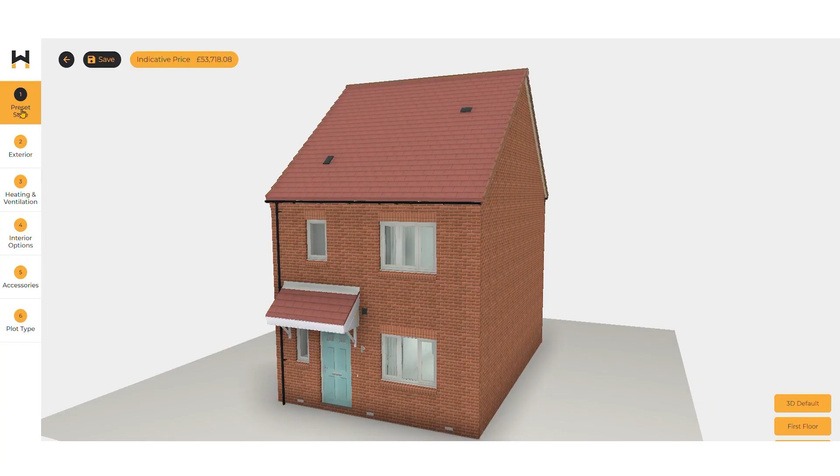I don't know of any other projects that bring all suppliers from all corners of my industry into this way. I think it's great that we've got 40 manufacturers, 20 designers and 1 architect that have been brought together for this project. When you bring together all of the supply chain, the designers and our team, that adds up to over 500 years of experience that has gone into every single house design. I've never been involved with a project before where we've worked directly with other manufacturers to produce one whole house.

I think it is fair to say that the industry is quite traditional, and it does have to adapt with the modern world. We do need to embrace change and modernise the way that we work, right the way through the process from start to finish, whether that's an architect, an engineer, or a manufacturer in our case. For house building, it's definitely an industry that should be utilising technology more readily.

It's clear during the process that I've been working on this that it can be done, and it can be done to a really high standard. Typically the construction industry will say we've always done it that way and hasn't been keen to change. However, with the Whole House project, we started with a blank piece of paper and we always asked why to every decision that we made.

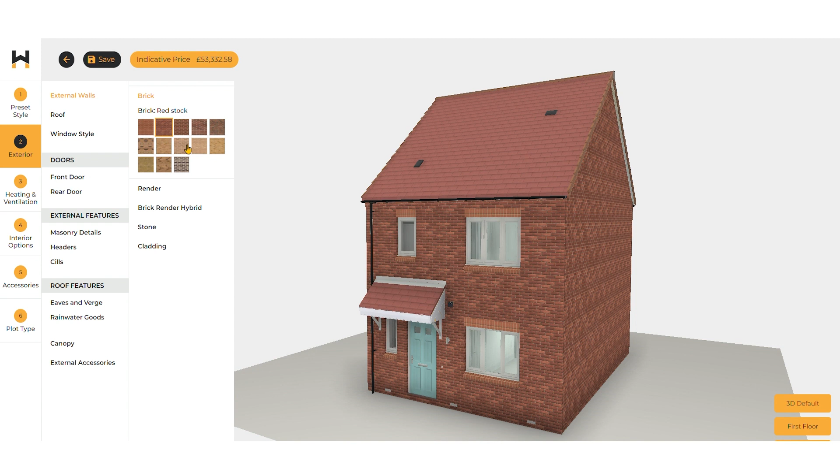By challenging ourselves right across the design process, we've been able to bring innovation across all parts of the design itself. Travis Perkins' Whole House project is set up to deal with design issues very well, and in my opinion that's because it's following a BIM way of working.

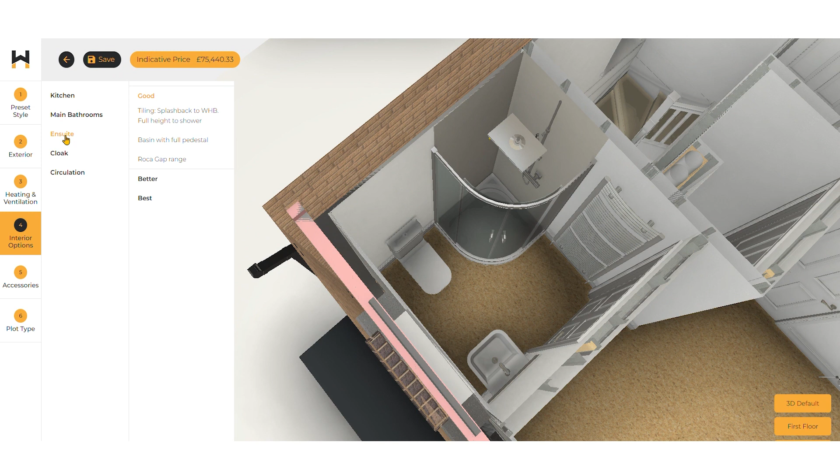So BIM stands for Building Information Modelling, and essentially it's where every component of that building is modelled in 3D, which is what we have here with this project. Being able to review designs in 3D beforehand will just eliminate any issues that we have on site because we've already tackled those issues. I think that'll be a massive benefit.

It'll be cost and time saving. Up until now there's been nothing as effective as this to eliminate site issues. With the Whole House project, there's a huge amount of effort that goes into the design stage before it gets anywhere near site. So we've done all of the thinking and the coordination before it's needed further down the process.

Space Group have been involved with innovative projects and digital workflows for many years. This project is a great example of bringing all of that together into a single environment.

Some might think that Whole House is a standardised product, but we think it's the actual opposite. Whole House gives you the opportunity to select a very wide range of options, but with the confidence that it's all pulled together in a very comprehensive and high quality way. There's a huge range of options that the customer can choose from, knowing that they're fully compatible with each other.

And that's because of all of the work that the manufacturers have done behind the scenes that the customer doesn't need to worry about. Often in the architectural profession, standardisation is seen as a negative, but we believe it is a real positive for reducing carbon and improving the quality of products. What the Whole House project does really well is bring all of those components together and demonstrate how that quality can be delivered and how we can reduce waste.

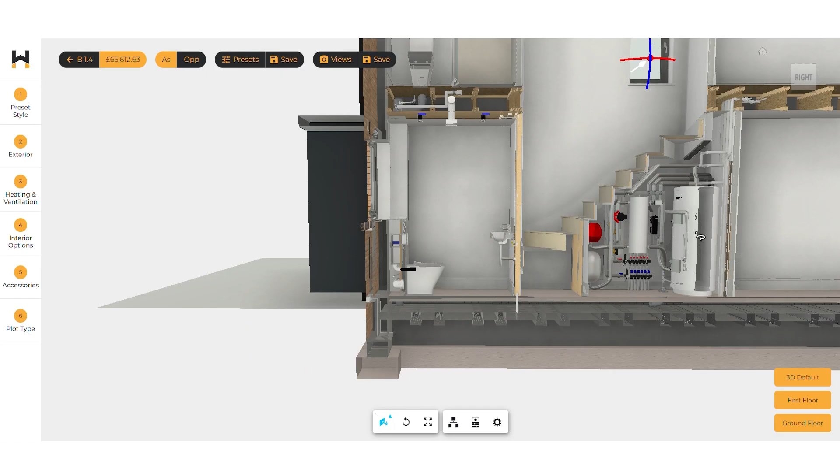I would say how this benefits the home builder is more than likely simplifying the whole process. It reduces the risk involved for them because all of the work has been done up front, and it is literally just a case of choosing their options and going from there.

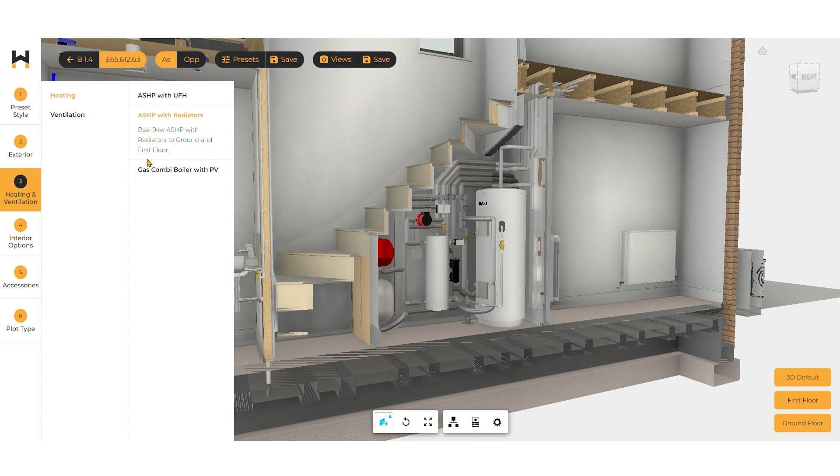One of the dangers that the customer faces between manufacturers like ourselves designing systems and then the procurement of the parts actually finally on site is that there can be a watering down of the specification. What Whole House does is give the opportunity not only to pick the exact specification you want, but also has dynamic pricing so you can see the impact of the choices you're making, and also gives you a 3D visualization to actually see what that selection will look like.

So the customer can choose any spec that they like with the confidence of knowing that that is within building regulations. So as a team, we've considered the knock-on effect of all of our design preferences.

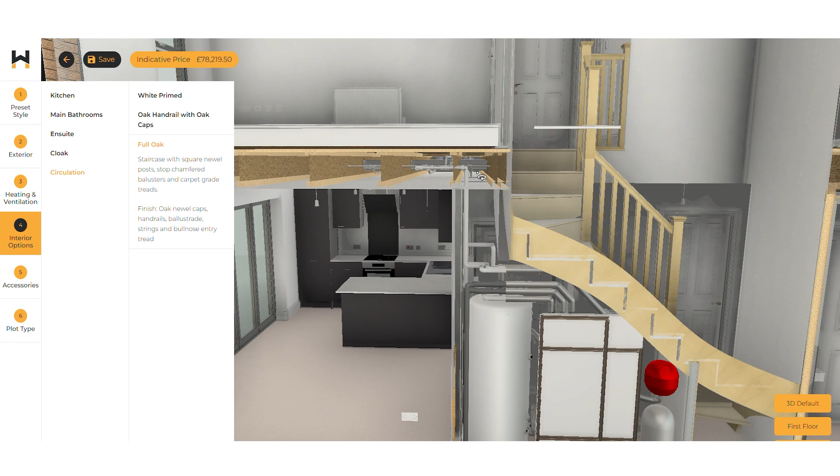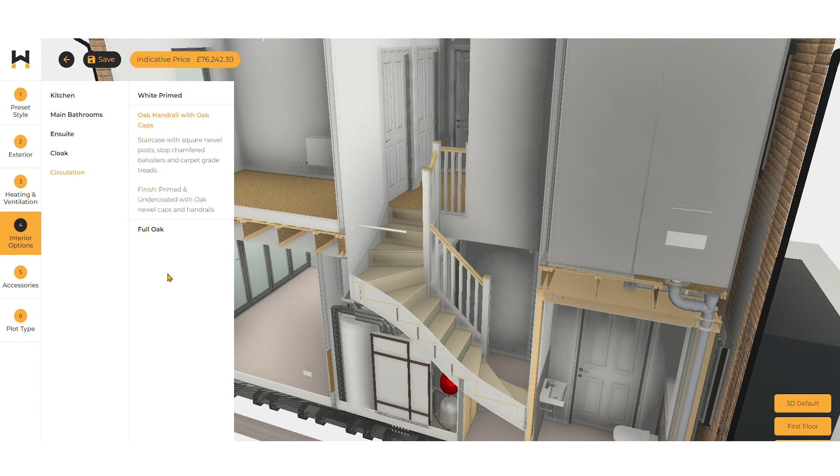For example, pipework under the floors, we've brought in waste designers, ventilation designers, joist designers to collaborate within that one design. We've addressed the material and labour cost by dealing with Staircraft directly. They're the company that link most closely with ourselves as a drainage manufacturer. So through conversations with them and Travis Perkins, we've managed to reroute pipework to get the most cost-effective solution.

That works for everyone. Normally, any plumbing pipes would be drilled on site, but we already have those built into the floor. The space in between pipes is already set, so we're removing the risk of the plumber drilling incorrectly, which would result in costly remedials and time spent on site with labour to fix that problem. We've overcome that, so you won't see that problem on site. We've already got the holes pre-drilled, ready for the pipes to go into.

So this is just one of the ways that we drive down the material cost and the labour cost with Whole House. One of the big benefits from Whole House is the accuracy you get for materials, so forecasting of materials. Every component of that house is already predetermined, so supply chain issues become easier. For example, if the plumber calls up and asks for 20 more bends, the client can have confidence that they have deviated from the design and can question why they need them.

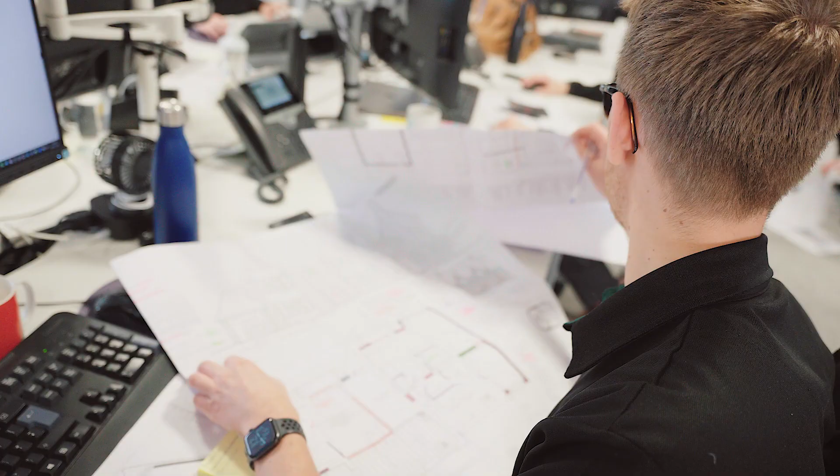That can have knock-on effects to every other trade that's in there, and ultimately tells you that they have gone against what has been put in place. From a manufacturer's point of view, Whole House gives us great confidence that spec will be upheld. Traditionally, breaking spec is very common within the industry, and from our point of view it's something that we don't want to happen.

What's really nice about Whole House is there's been additional thought given to how much material is needed for each individual option. For example, we know exactly how much skirting board is needed or how much pipework. Often in the construction industry, there's huge waste in over-ordering skirting board or pipework. Because we've considered that during design, we can minimise waste on site.

Everything in Whole House has been designed to interrelate and work together so that we're sure we'll get the level of quality, but also the compliance that's needed for the project itself. In regards to regulations, we've been looking at Part F and Part O. Both of those regulations work in conjunction with each other.

Over the last year, there's been a lot of discussion about Part O. It's a complicated document and we have to consider it in relation to Part F. What our guys have done is spend a lot of time looking at how that affects Whole House, looking at the ventilation systems we're proposing and making sure compliance comes first.

Legislation changes add a lot of pressure to the regional house builder. What we've done is remove that headache by addressing it in the design phase.

I can't think of a time when there's been more change in legislation in the housing sector. The government is putting lots of new standards in place. For any house builder, this is a challenge, but particularly for regional house builders, having to keep up to date with all of these changes has to be a challenge.